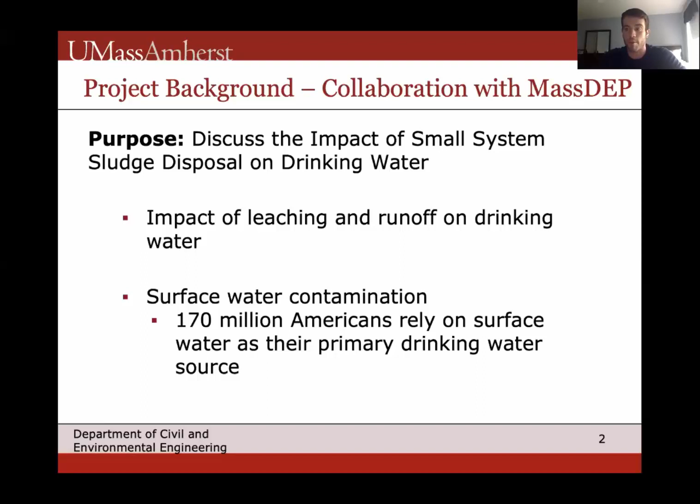The three goals we came up with: minimizing the impact of sludge disposal on drinking water for small systems, both environmentally and economically. We wanted to identify the primary different methods of local sludge disposal in Western Mass, their environmental impact, and the importance of being deliberate with sludge disposal decisions. And also we wanted to propose different strategies to increase the sustainability of this process in both Franklin and Hampshire counties.

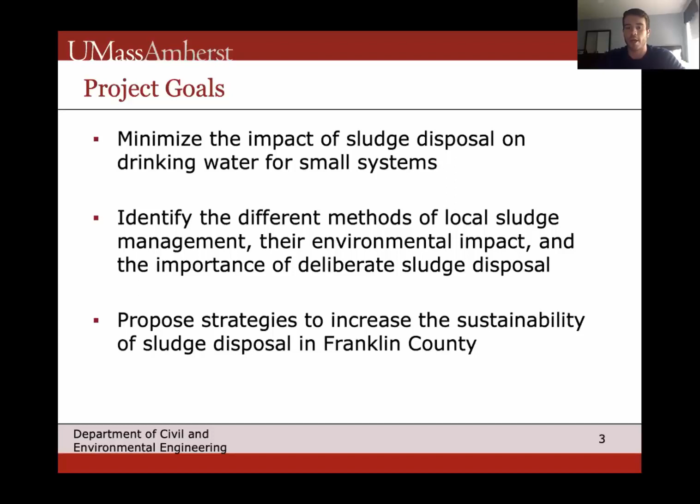So to start, wastewater sludge is essentially the solid residual left over after wastewater treatment. Biosolids are treated sludge that can be utilized for things like land application. And there are different categories of biosolids with different permits and different regulations surrounding them on where you can apply them.

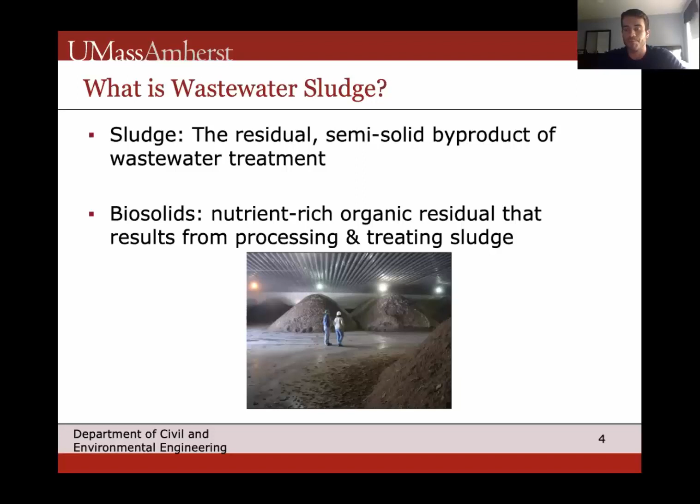With the history of sludge management, prior to 1972, typically in the Northeast at least, we were just dumping sludge in the ocean, which obviously presented some problems with throwing sludge with high levels of BOD and COD into the ocean. This was pulling out high levels of oxygen, degrading ecosystems. So we came to our senses and realized this was probably not a good thing to be doing.

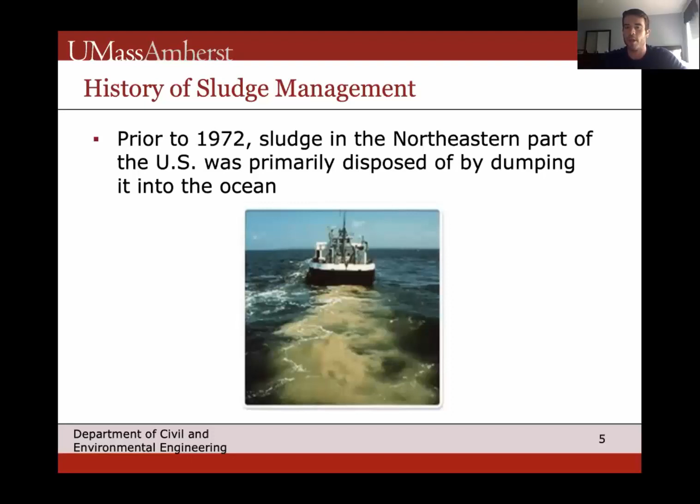And then we came up with 5 main reasons why sustainable sludge management is important in Western Mass. We want to protect ecosystems, utilize these nutrients for land applications through utilizing biosolids as opposed to dumping sludge in a landfill or incinerating it. We want to prevent contamination of drinking water, protect human health from different contaminants, and ultimately reduce greenhouse gas emissions.

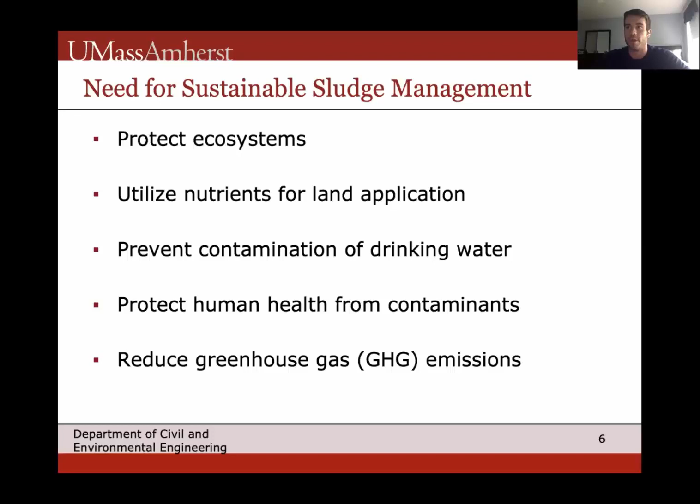All right, so some potential impacts that poor sludge management can have on drinking water is eutrophication, which is basically where nitrates and phosphates get into surface water, which promotes excessive growth of phytoplankton, which can be very damaging to ecosystems and even destroy keystone species. Then we also have leaching with landfills, which can contaminate drinking water, as well as heavy metals and dioxins and a lot of other airborne toxins created from incinerators that can impact surface and groundwater.

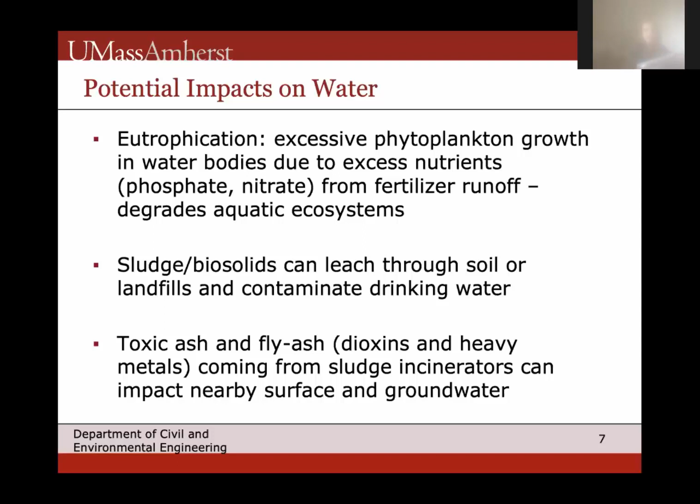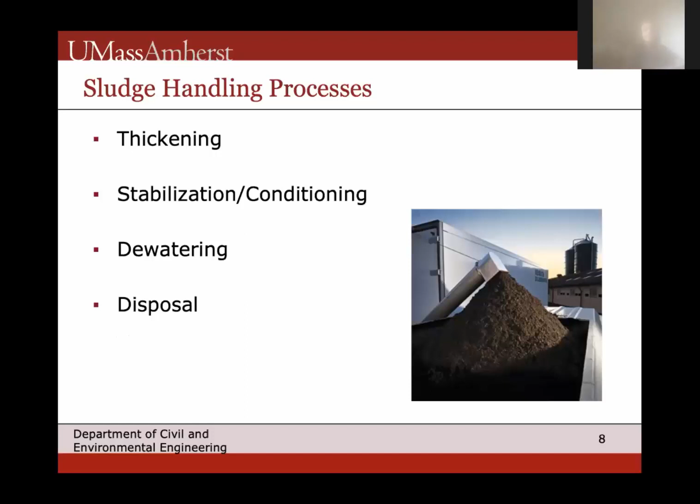So next we have the 4 types of sludge handling: sludge thickening, then sludge gets stabilized and conditioned, then dewatered, and then finally disposed of. We'll start off with sludge thickening. There are 3 main types of sludge thickeners used: a gravity thickener, centrifugal thickener, and a dissolved air flotation thickener.

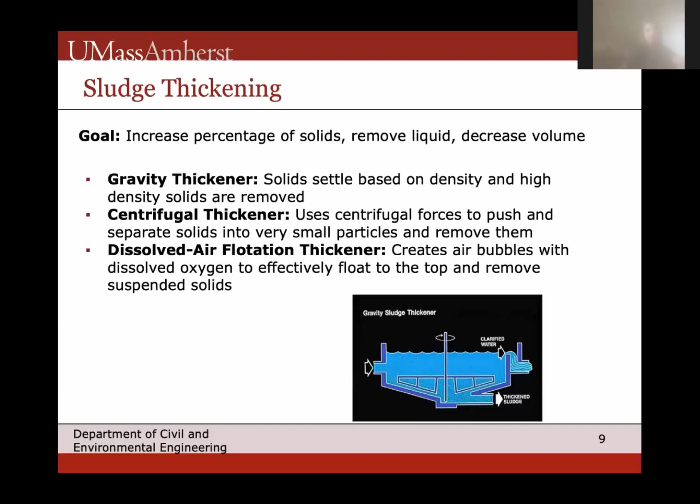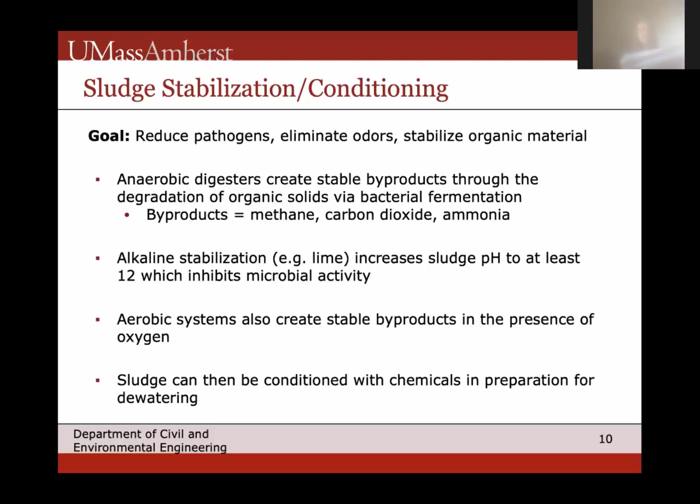Then we have sludge stabilization, which is basically where anaerobic digesters create stable byproducts through bacterial fermentation. Ideally, these byproducts, methane, carbon dioxide, ammonia, can be recycled for energy use. Aerobic systems also create stable byproducts in the presence of oxygen, and alkaline stabilization is a process utilized to maintain pH values. And sludge can also be conditioned with chemicals in preparation for dewatering, which is the next process of sludge processing.

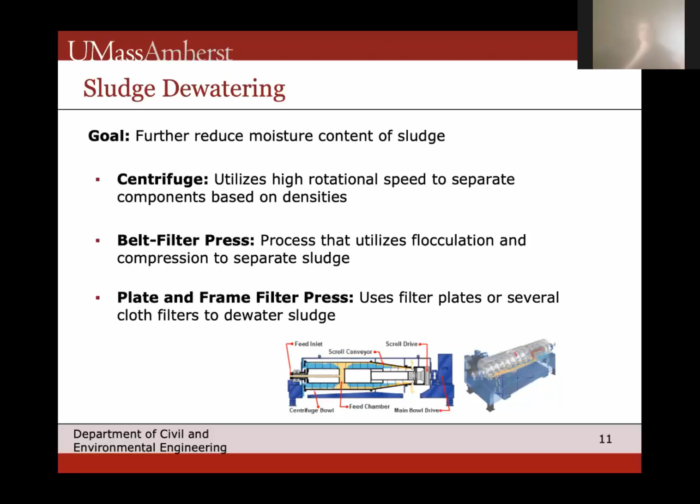With sludge dewatering, there are three main types used. The first one is the centrifuge, which uses high rotational speeds, just like with sludge thickening, to separate components of sludge based on densities, like in this diagram down here. The middle portion spins at a high velocity, which forces sediments to be pushed outward and removed from the water. Then we have the belt filter press, which utilizes flocculation and compression to separate sludge, as well as the traditional plate and frame filter press, which uses either plates or several cloth filters to dewater sludge.

And then finally we have sludge disposal, which can be used in three main ways. As Pat said before, we used to simply just dump it out into the ocean, but now we use landfills, incineration facilities, and land application.

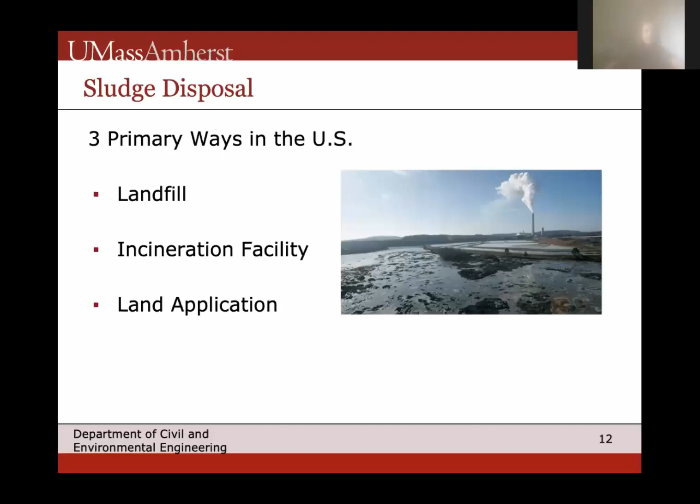So first we'll talk about landfills, and the pros and cons of landfills. The pros, I'll say, is oftentimes there's no permit needed, and it can recycle methane optimally, where it produces methane, but hopefully you can reuse that for other energy. And it has a lower cost compared to some other methods of disposing sludge.

But the cons are that it increases the generic output of methane by a substantial amount and creates leachate with an increase in a lot of other pollutants, as well as greenhouse gas emissions, and reduces space for waste.

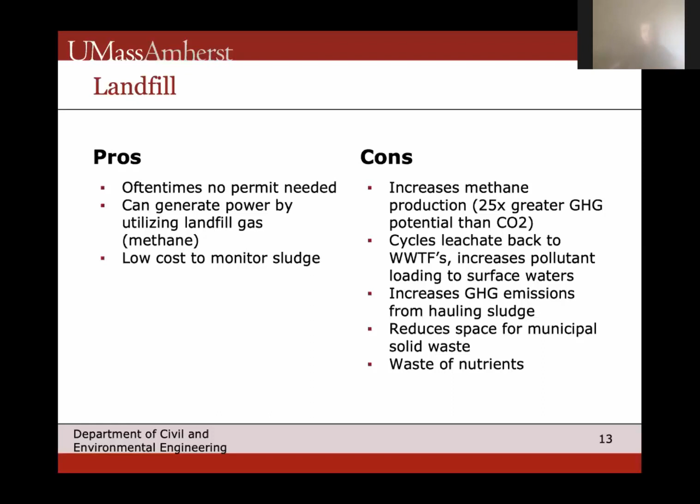So then we'll move on to incineration facilities, which are basically where sludge is just burned after it's treated, and a lot is released into the atmosphere. So the pros is we got a very low cost, and it maintains more landfill space, and it reduces risk to our water sources. But our cons is that it again has high greenhouse gas emissions.

This time a lot of heavy metals and a lot of other airborne pollutants can be released, with a lot of CECs, which is contaminants of emerging concern, also released. Also, there's a lot of high costs associated with trucking to incineration facilities, which happens to be what we do in Amherst.

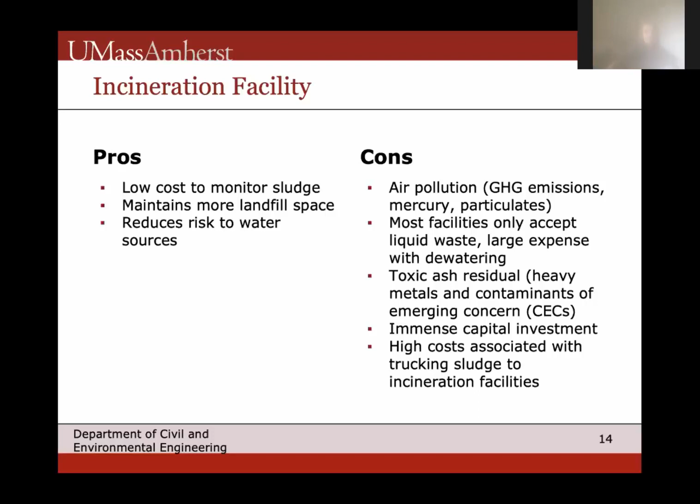Hey, Doug, thank you. I'm going to have you skip to slide 19, just for the sake of time. Doug or Pat, go to slide 19.

Okay, so we interviewed a wastewater treatment operator named Andrew, and he basically told us all about how sludge was treated in Amherst. So basically we get it from primary clarifiers and waste activated sludge. Then we use a gravity thickener that has storage of up to 60,000 gallons.

Wastewater treatment typically ships out 18,000 of thickened sludge to an MDC plant in Hartford, Connecticut, which is an immense expense, and that's the only contract that we have in Amherst. And then other Franklin and Hampshire County wastewater treatment plants go to the Upper Blackstone Water Pollution Abatement District.

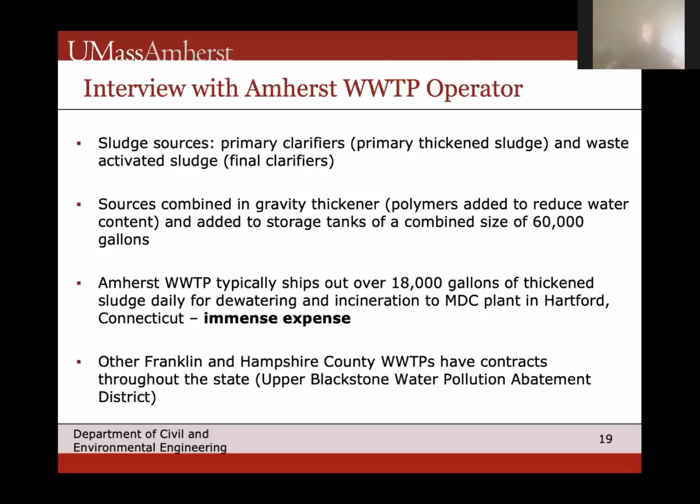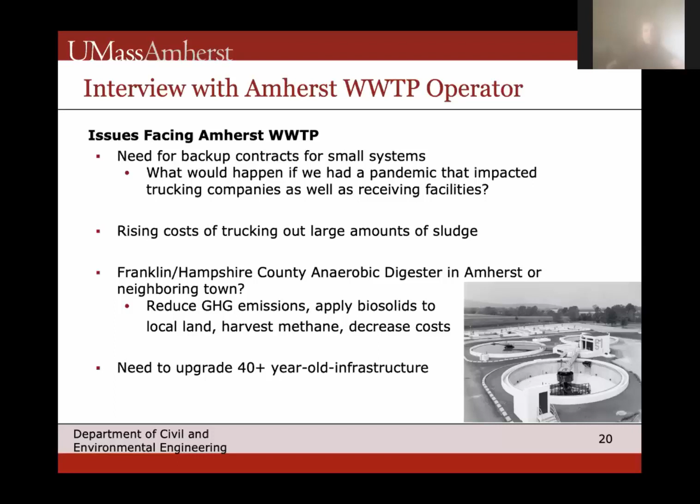And then we talked about the need for an anaerobic digester in Amherst or in a neighboring town in Franklin County, which could have a very large impact on the environment and costs and a lot of other stuff in Franklin County.

Yeah, so options for Franklin County: they can continue with the status quo, which is incineration. And the issue with this is, as more local facilities close, like the Montague process just recently closed, now Greenfield is having to truck out their sludge daily. This is like 2 to 4 trucks all the way across the state. So we're facing increasing costs there and increasing trucking related emissions. Just in 2020, they estimate the cost to be $540,000.

And with an anaerobic digester, we'll see lower greenhouse gas emissions. We'll actually be utilizing valuable nutrients in biosolids, better stabilizing the sludge to reduce the risk of it contaminating things like groundwater. And it is a large upfront capital investment, millions, but ultimately, I think it's a good investment and will ultimately save Western Mass a lot of money.

Yeah, so this is just going through some of the expenses. As you see in Greenfield, which is a town in Franklin County, in 2016, their trucking costs for disposing of sludge was $168,000. By 2020, it's up to $540,000. So we just see that increasing more and more.

And an anaerobic digester is $4 to $7.5 million in Franklin County. There's a potential for federal grant money if this becomes a regional digester. So ultimately, I think within a decade, we'll end up saving money by making this large upfront capital investment. So we came to the conclusion that an anaerobic digester is pretty essential for a sustainable future in Western Mass in terms of disposing of sludge. And that's what we got.

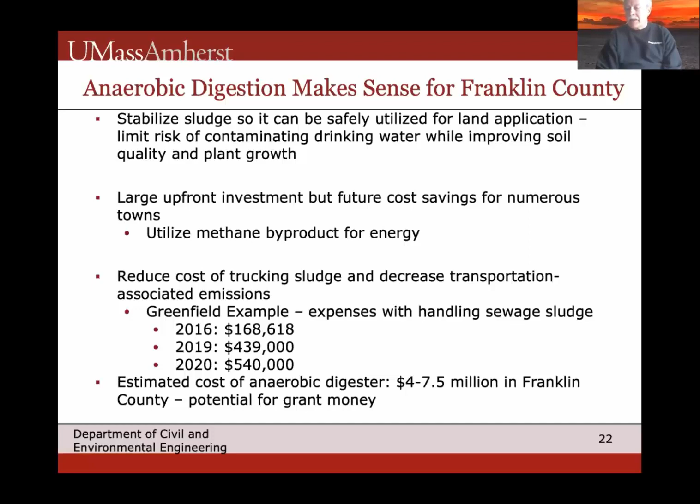So one of the things that has happened recently is PFAS contamination in sludge. I know up in Maine they had an incident where they had PFAS application on a farm and it got into a public water supply from the sludge. So I think that might be another issue that you guys are going to have to watch out for, as far as land application.

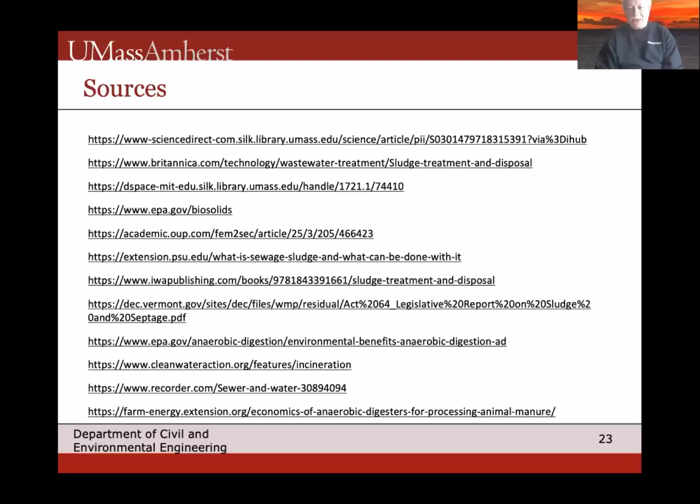Right, and that's the same idea with those CECs, things like pharmaceuticals and endocrine disruptors. They're not really regulated. Well, the problem with PFAS is it's going to be regulated. Right. Thank you, Bob, for the question. It's a very good point.

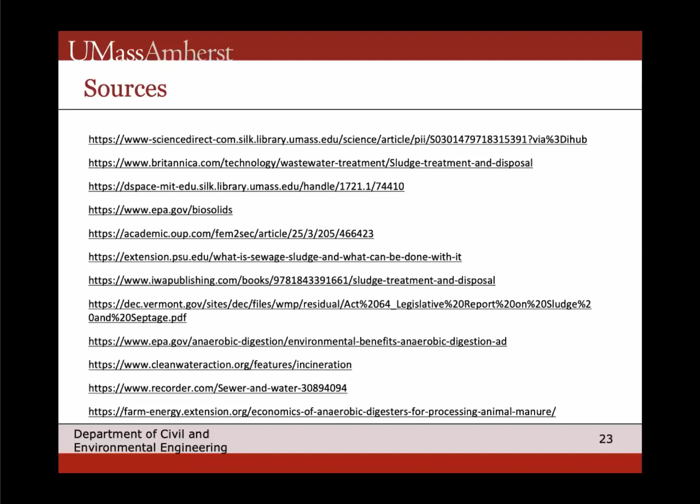And I just want to say quickly, Doug is a computer science major and Patrick is a public health major, so two non-civil engineers that work at our Water and Energy Technology Center at UMass. And it just goes to show you that cross-disciplinary backgrounds can all still be very applicable to water treatment.